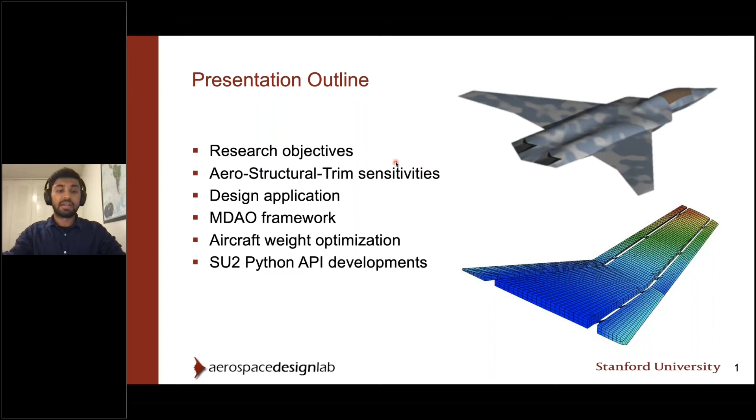So unlike most academic research projects, ours is sort of unique in the sense that we're heavily focused in terms of the industry, and the framework and the tools we're developing are meant to be industrial strength. And so the questions we're asking is, can coupled multi-physics sensitivity analysis be useful in these types of settings? And in particular, can these types of workflows and frameworks be flexible and modular enough to meet the demands of the industry?

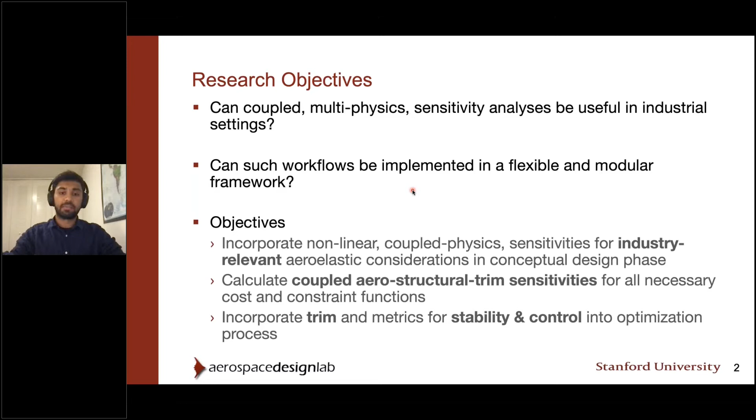So then our objectives can be summarized in three forms: of course to have nonlinear high fidelity tools like SU2 to perform some of these coupled physics calculations and use those sensitivities for aeroelastic considerations, particularly in the conceptual design phase. And so we want to be able to efficiently calculate these coupled aerostructural trim sensitivities for all necessary cost and constraint functions, which requires incorporating metrics for trim, aircraft stability and control into the optimization process.

So here's just a brief few slides on the theory and how we get these sensitivities. So we start with the governing equations of the three disciplines: the aerodynamics, the structures, and the trim, where Q is the vector of your aerodynamic state variables, U are the displacements, and delta here is the vector of control surface deflections. Compared to the aerodynamics and the structures, the trim equations have very low dimensionality because they're simply just force and moment balances. So they're much easier to deal with compared to the aero and structural disciplines.

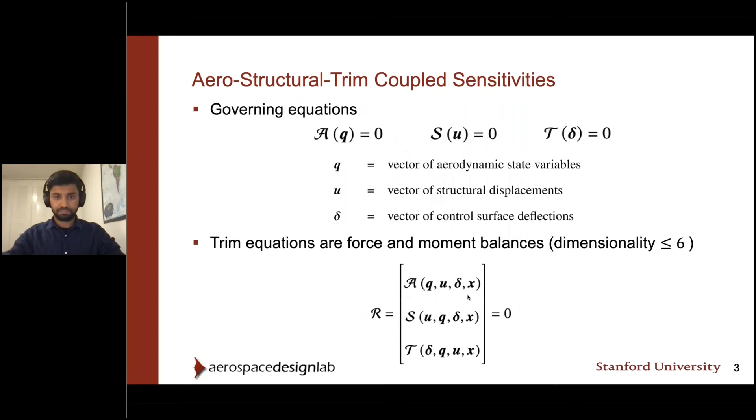But combining all of these into a single multidisciplinary system, you get the overall residual that we are ultimately trying to solve for in this case. In general, all three equations are fully coupled. However, the coupling can be stronger or weaker depending on the test case. In most cases, we have a lot more design variables compared to functionals, objective functions of interest.

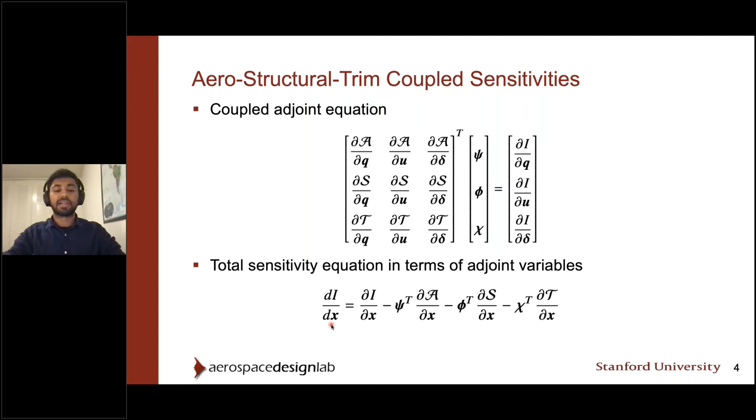So then we solve this disciplinary system and for the sensitivities with the adjoint approach, as we see here. So we solve this linear system for the adjoint variables here, which we then use to compute the total sensitivities with respect to an arbitrary number of design variables. And this is the most efficient way to do so. And this is what we're in the process of implementing in our framework.

So this diagram here summarizes our overall framework for the sensitivity analysis. Our framework will not only enable the optimization of aerodynamic properties based on, say, structural stiffness, but also optimize the aeroelastic stiffness based on metrics of aircraft stability and control associated with those aerodynamic properties.

So then the primary objective in our case is to assess whether the structural requirements that we identify for the aircraft serve to optimize the qualities of aerodynamic performance, stability, and control. And that includes considerations for things like flutter.

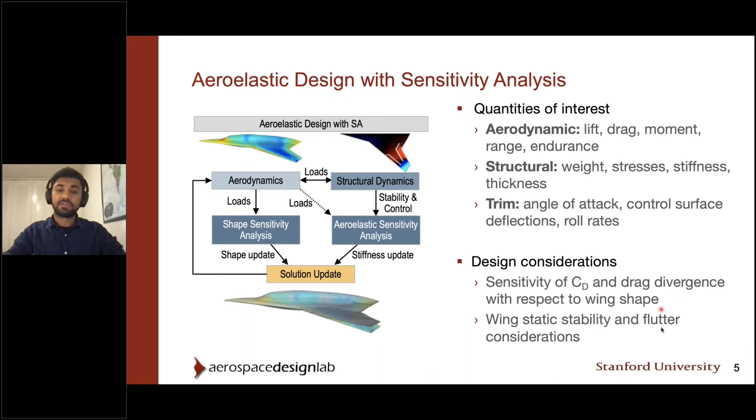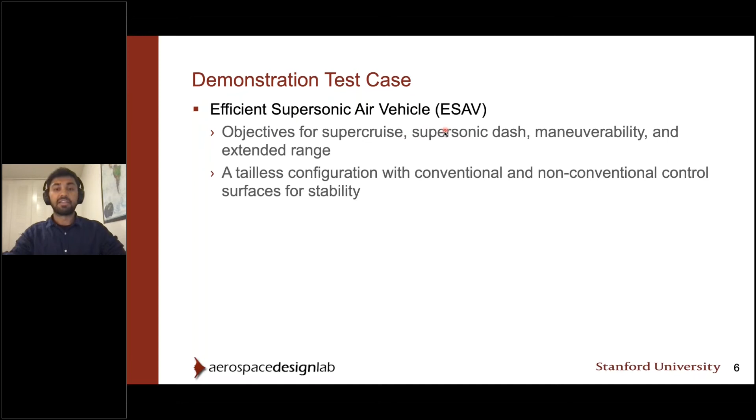And our application test case that we are currently working with is the Efficient Supersonic Air Vehicle, originally developed by the Air Force Research Lab. This particular model has objectives for supersonic cruise, dash, very high maneuverability requirements, and of course, things like range and endurance.

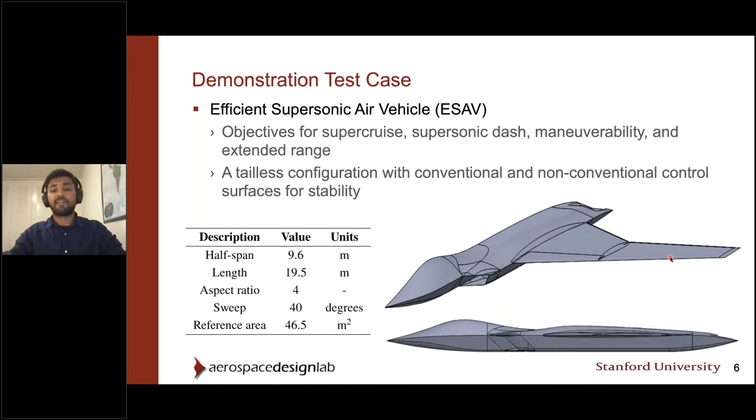So these mission requirements lead to a tailless configuration with both conventional and non-conventional control surfaces for aircraft stability and control. So here is the model of the ESAV, and this is the half model that we're working with currently for our computations.

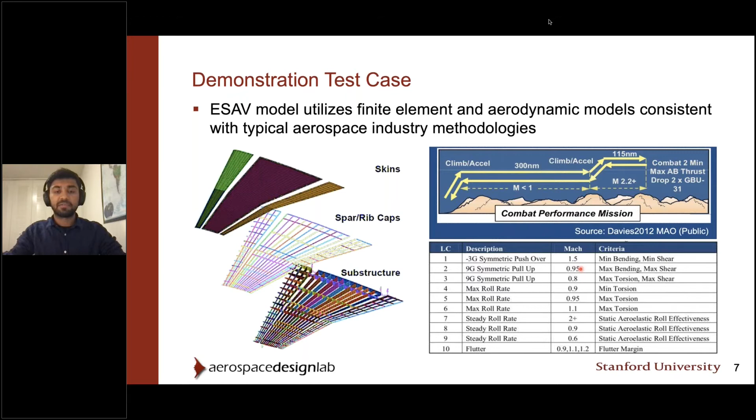The ESAV model, because it comes directly from the industry, is also utilizing structural finite element modeling techniques that are consistent with typical aerospace methodologies, and the design and engineering processes that we are trying to address in this project. We are also considering multiple flight conditions because a single set of flight conditions rarely defines a design. So adding multiple competing requirements, typically we're targeting 3 to 5 scenarios perhaps, will introduce compromise into the design, but it will ultimately generate a robust wing.

So moving a little bit on to the computational framework side, of course, we're using SU2 for the high fidelity CFD. We're also using the mesh deformation solvers that exist within SU2, as well as the freeform deformation features for the aerodynamic shape parameterization. We use Nastran for the structural modeling and the evaluation of trim and aeroelastic responses, sort of building off of the previous presentation as Nicola introduced.

The load and displacement transfer schemes are part of MELD. It's part of the FUNtoFEM package developed out of Georgia Tech. And then our optimizer is SNOPT. And since everything we do is interfaced through Python, we have pyOptSparse to integrate SNOPT. And all of these various tools are combined into an MDAO architecture through OpenMDAO.

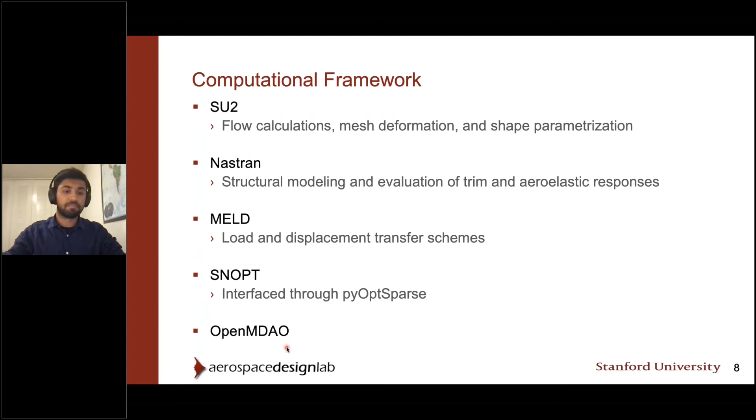So we add the high fidelity corrections from SU2 to Nastran by a series of correction factors. Nastran by default only has a low fidelity doublet lattice method using just 2D panel meshes, but we can provide a series of corrections through these 3 different sets of matrices to alter the lift and the moment calculations. Currently, we're only working with this FA2J matrix, where we provide the delta CP corrections from SU2 after they've been interpolated, and we add them as corrections or offsets to the DLM predictions.

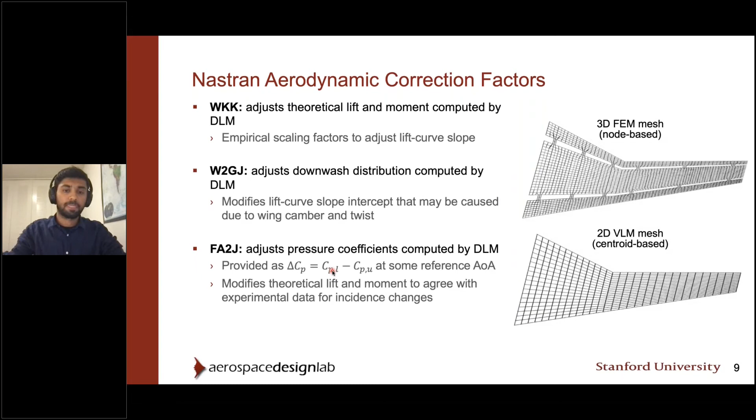So here are just some representative results. If you were to use Nastran alone, your pressure distribution may look something like this. And here's for a 0 angle of attack at subsonic, transonic, and supersonic Mach. And here is for a higher angle of attack. So these are just the delta CP pressure distributions using the low fidelity VLM only.

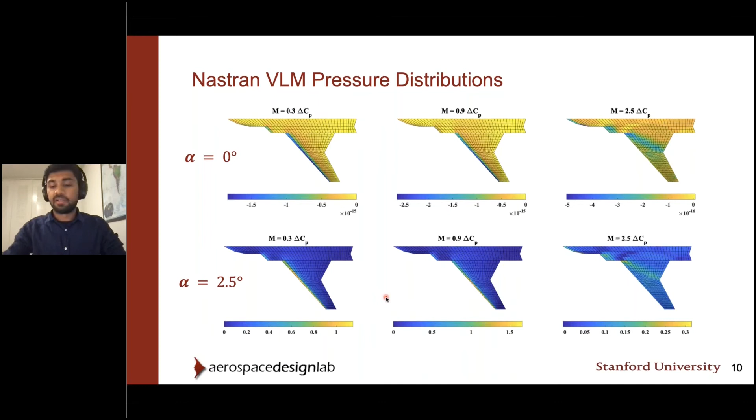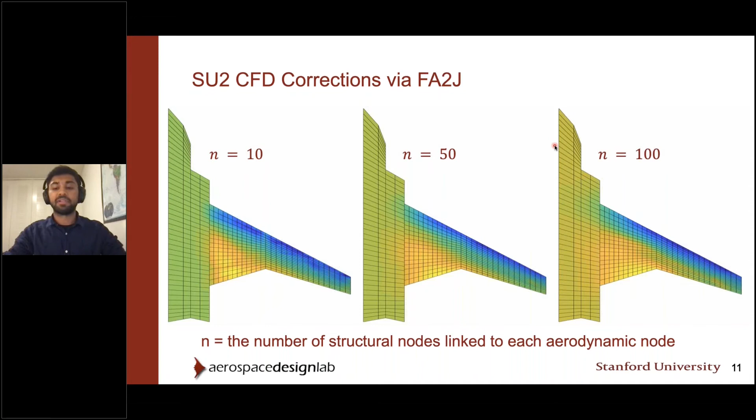But then if we introduce corrections from SU2, your pressure distribution may look something like this. And here is just increasing, when we manipulate the interpolation parameters. So this is for a transonic case, and here we have the supersonic case. So you can see that the pressure distributions look quite different from the DLM pictures we were just showing in the previous slide, which is good because that shows that what is currently used in industry based on the DLM method may be insufficient in many cases, and it provides value for integrating high fidelity tools like CFD with Nastran for these types of problems.

So we are orchestrating the sensitivity analysis calculations and optimization through OpenMDAO, which is what is used to compute the sensitivities and the gradients that we want. In OpenMDAO, our model consists of all the various tools, and ultimately we're interested in calculating the total derivatives that come out of it based on some input design variables. But at the OpenMDAO level, we are required to supply some partial derivatives that are handled at the subcomponent level. And the way OpenMDAO is structured, based on the unified derivatives equation by Professor Martins and Hwang, they will automatically compute the total derivatives, assuming that the subcomponent level and the component level have the correct partial derivatives defined.

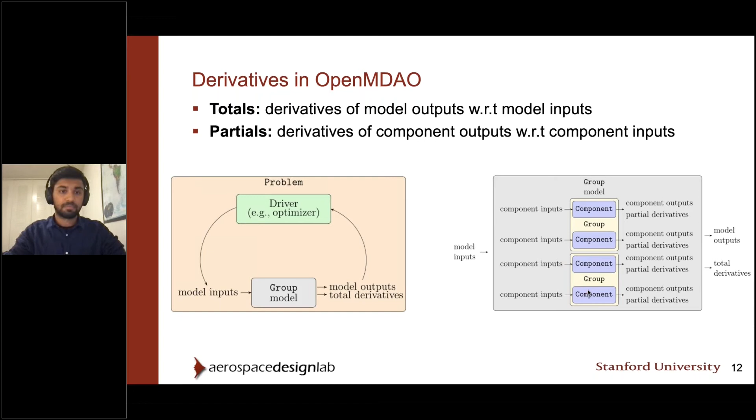So when we put all of these tools together in OpenMDAO, it outputs this nice visual for just visualizing how your model looks and the different connections and the flow of information that you have put together. So there's not much to say here. Here is just a single scenario, but we can replicate this for an arbitrary number of design considerations.

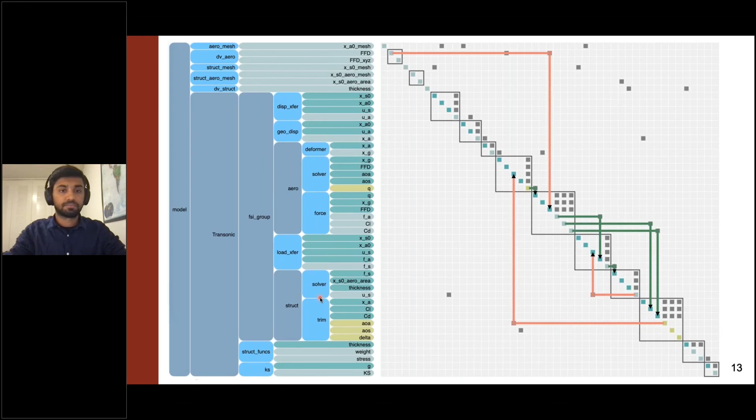So moving on to a representative optimization problem with the framework assembled, we're just starting to apply this for actual aero-structural-trim optimizations. But here we just have a weight minimization problem subject to stress constraints, where our design variables are the element thicknesses in the structural model. We start out with an initial uniform thickness distribution of 1.5 inches. This corresponds to an initial weight of about 73,000 pounds.

And as a constraint, we're setting the maximum allowable design limit to be 40,000 PSI. So considering each individual element would lead to over 20,000 constraints in our model. So for computational efficiency purposes, we are using constraint aggregation to improve those types of calculations.

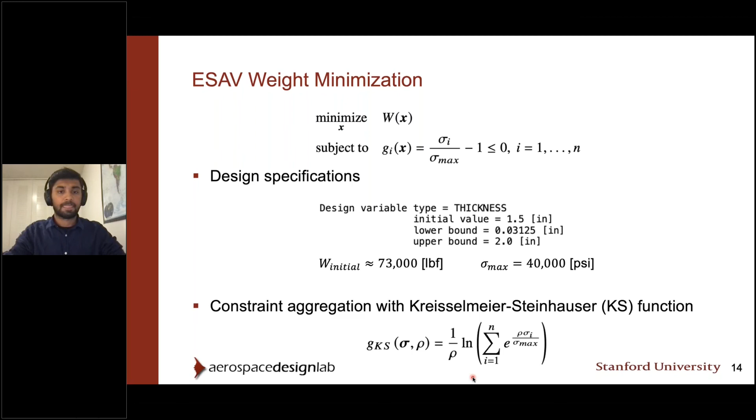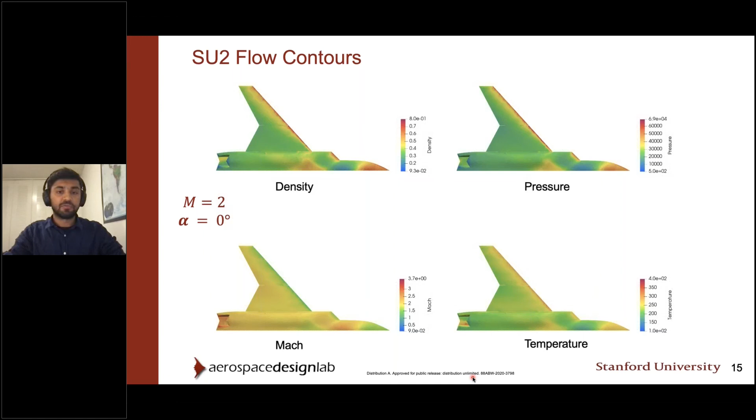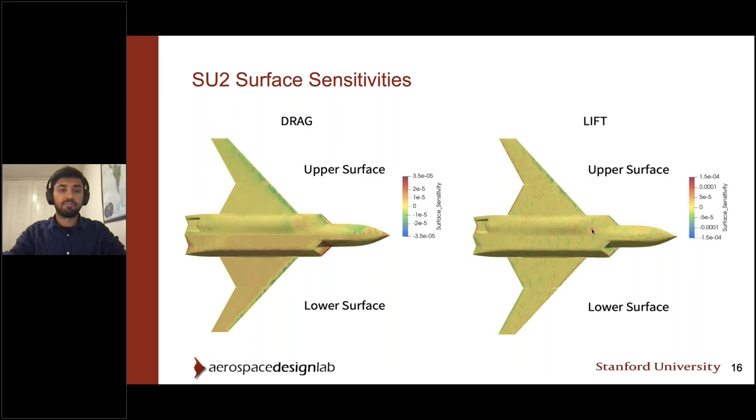Yeah, so the next few slides are just going to be some representative results. Here's just some SU2 flow contours. Here we have the surface sensitivities that we get out of the discrete adjoint solver in SU2. Here on the left is for the drag on the upper and lower surfaces, and on the right for the lift. And this is based on, again, a parameterization through the freeform deformation boxes.

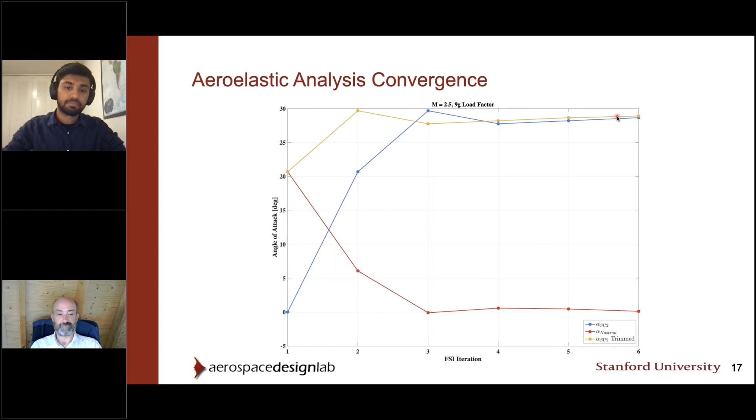So this is for a supersonic 1G case. And then this next plot here is for a 9G load condition, also at the supersonic case. And the converged trim angle of attack is about 30 degrees, also in 3 or 4 iterations, so that's pretty good. Here we see some normalized stresses, normalized by the maximum design stress. Here for the supersonic case, here transonic case.

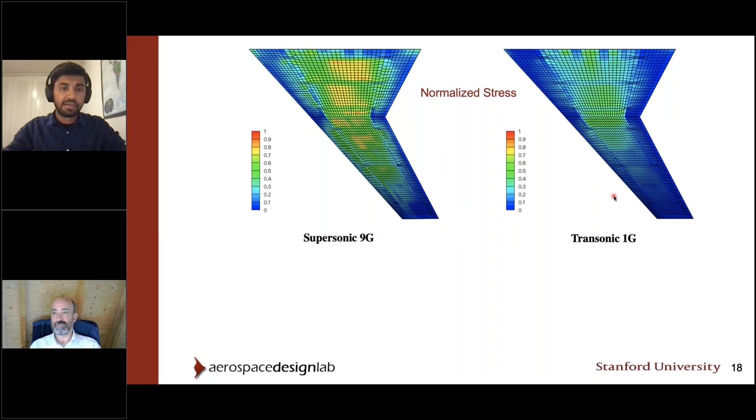Here is just the optimized thicknesses. So in this case, it's pretty close to the minimum with some concentrations of high thicknesses, but on the right with the transonic 1G case, all of the design thicknesses were essentially driven to the lower bound that we set for the design variables.

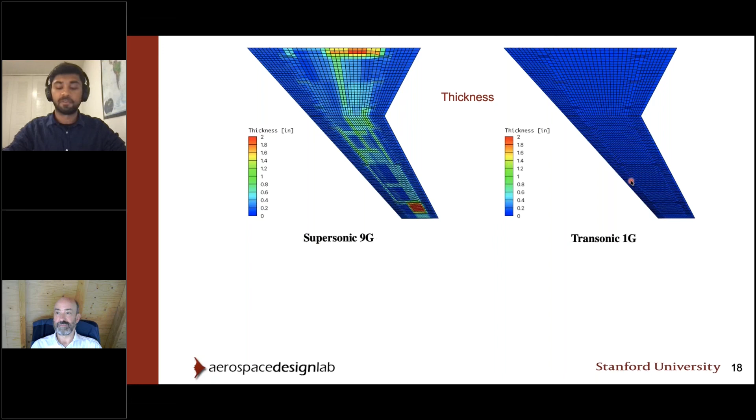And then just a brief summary of the various other cases, comparing the Nastran VLM predictions with SU2 Nastran coupling. We see the 2 cases are in generally very good agreement. And here's an interesting one where the weight is about the same for the transonic 1G case, but the coupling produces a slightly lower stress structure. But in general, the results are in reasonable agreement.

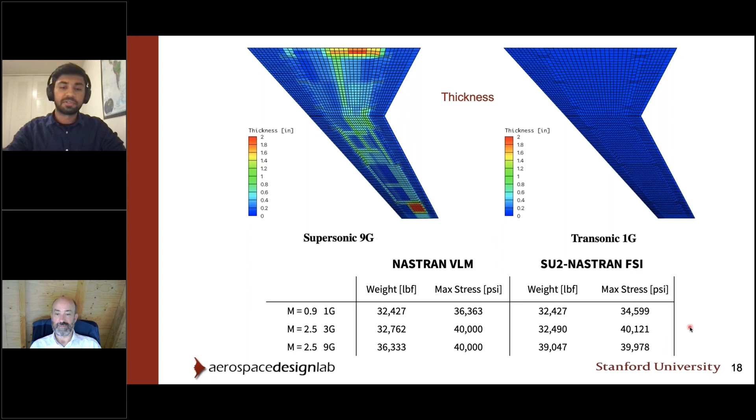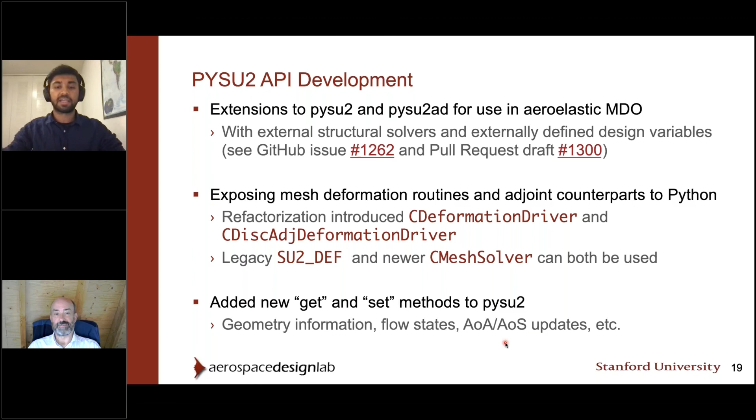So as part of this work, we've done a lot of work to extend the Python API for SU2, with particular focus on coupling with external structures and potentially externally defined design variables. This work has been done with my colleague Alessandro Gastaldi. We've worked to introduce two new deformation drivers and expose them to Python: the CDeformationDriver, and also the discrete adjoint counterpart for that. And they are compatible with both the legacy deformation solver as well as the newer one, adjusted depending on the config options that you set. And we've added a bunch of additional methods for getting geometry information, setting the trimmed angle of attack, angle of sideslip, and so on.

So just to summarize, we are interested in enabling routine aerodynamic, structural, and trim analysis and design optimization. And we're developing a tool that is meant to be industrial strength. The idea is to use this in the conceptual design phases, which requires flexibility in the problem setup and solver interfacing to meet the needs of the industry. OpenMDAO really facilitates this, particularly allowing for arbitrary flight conditions fairly easily and automating many things like connections and data transfers, inputs, outputs. At the end of the day, we're using these coupled aero-structural-trim sensitivities to provide insight into the physics, but also a path to a reasonable design solution. This is particularly good in cases when the coupled physics may be too complex to characterize and where traditional engineering approaches may be inadequate.